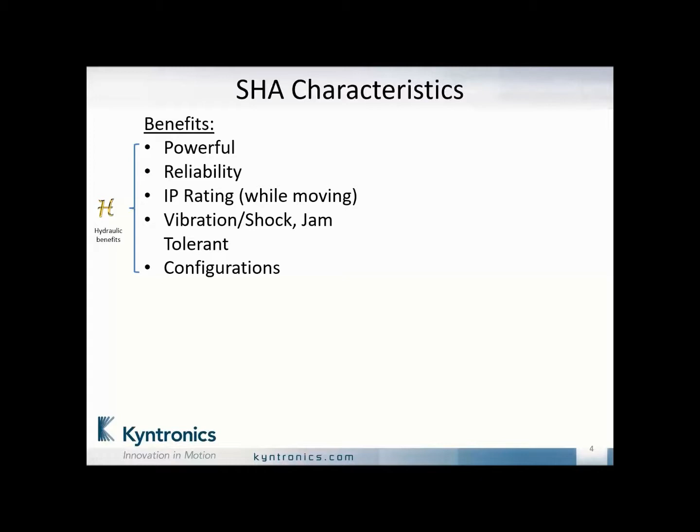So a quick review, the SHA itself is what we call the smart hydraulic actuator. It's a combination between hydraulics as well as electrical, the hydraulic benefits - very powerful, reliable solution. Hydraulics have been around for a long time. We're taking advantage of the seal technology, etc. IP ratings of hydraulics are very strong. Vibration, shock, jam tolerant - hydraulics have a lot of capabilities there, as well as some configurations we're going to be getting into.

And then we add the benefits of electrical - on-demand power, it only needs power when it's moving. A lot of versatile control capabilities, fieldbus connectivity, and of course no hoses or leaking hydraulic fluid. It's a very cost-effective solution - the SHA is on the low end as well. It really gets very cost-effective on the higher end, about 5,000 to 8,000 pound force.

Some of the challenges, of course, are the speeds at higher loads - those horsepowers are significant and massive motors. The other challenge is communicating that it's somewhat perceived as complex. When you look at the SHA, it can be simple, and we'll talk about that as well.

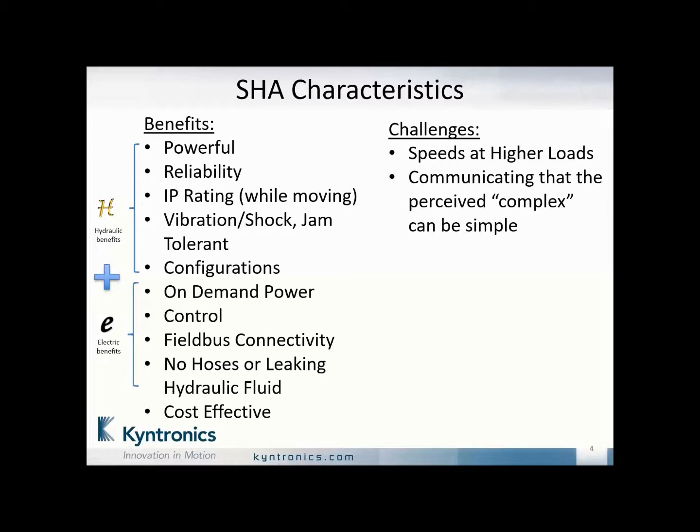One thing that we're trying to do to make it simple is the all-in-one solution itself. To our knowledge, nobody else out there is really doing what we're doing, from a standard product, from low horsepower, low pound force to 84,000 pound force, as a standard with voltages, AC, DC, etc. So we try to eliminate that finger pointing.

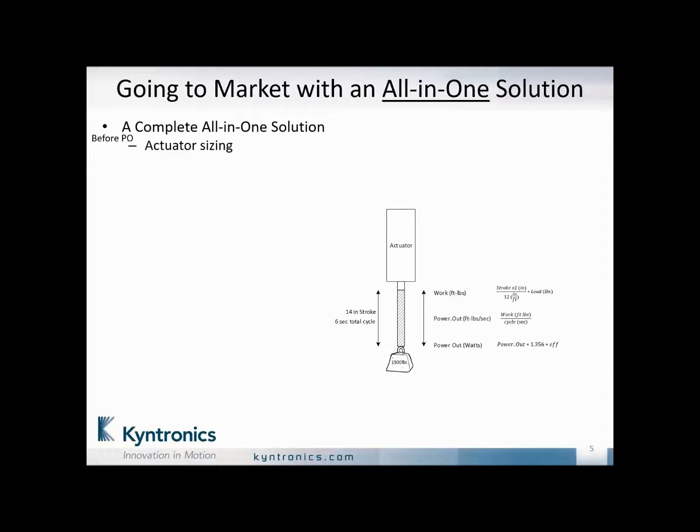We spend a lot of time up front talking to the customer, talking to you, trying to understand the application. It's very important to us to make sure we size it properly. We're involved right from the beginning. Obviously, whatever information you guys can provide is helpful in the situation. We make sure the machine, as we proceed, can fit the actuator in properly.

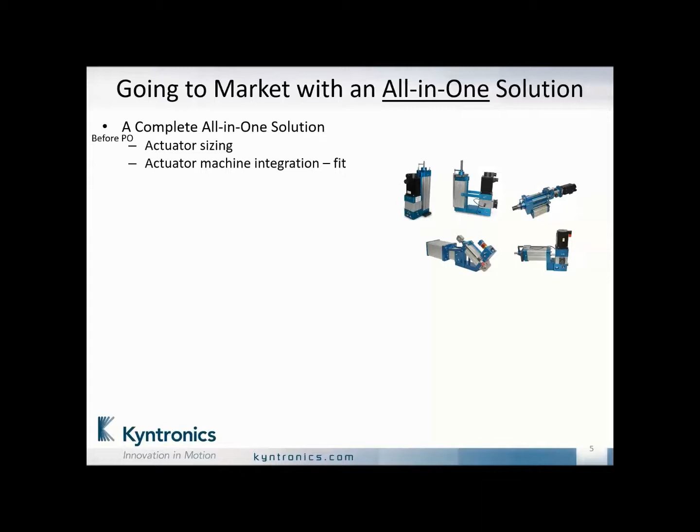There's all kinds of different ways to make that happen. We'll select the motor from hopefully our standard selection, select the drive itself, make sure the motor goes onto the actuator properly. As we proceed, again, it's electrical schematics from our standards - we'll make sure we apply the right schematics for the application, source the right drive, integrate the right drive.

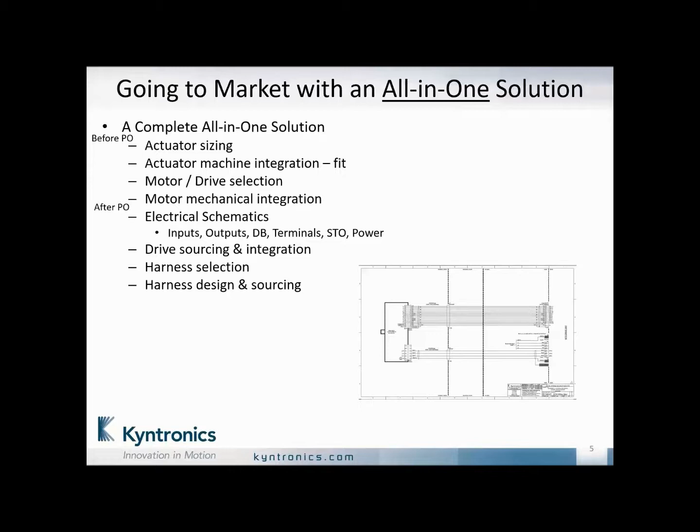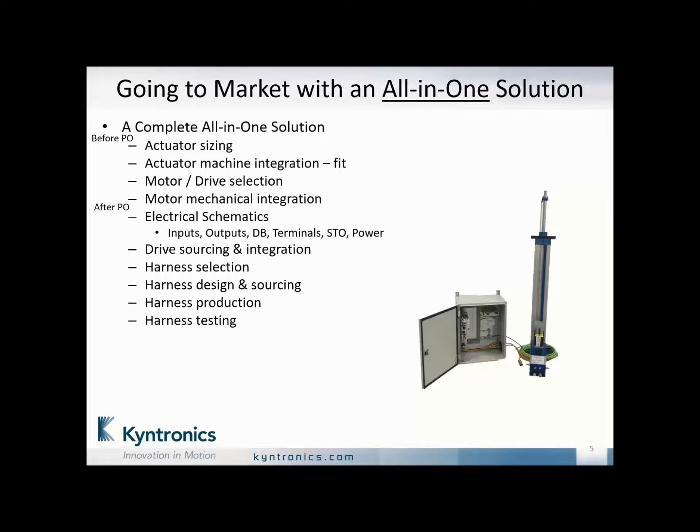Harnesses are a real pain, as we can all appreciate. Some harnesses we procure, some harnesses we produce here - we design and source all of that for you. We produce them, and test them, making sure everything's tested here. Harnesses that go out in the field untested can sometimes cost hours and a lot of money and headaches out there in the field. We try to make sure everything's tested as much as possible here.

The software itself - integration, field bus, mapping - standard programming is used. We test everything here as much as we can to the application. Of course, tuning in the field may be required, but at the end of the day, it's owned by Kyntronics. The only finger that's pointing is at Kyntronics. We try to make sure that everything's done up front properly, so at the end the result is a satisfied customer.

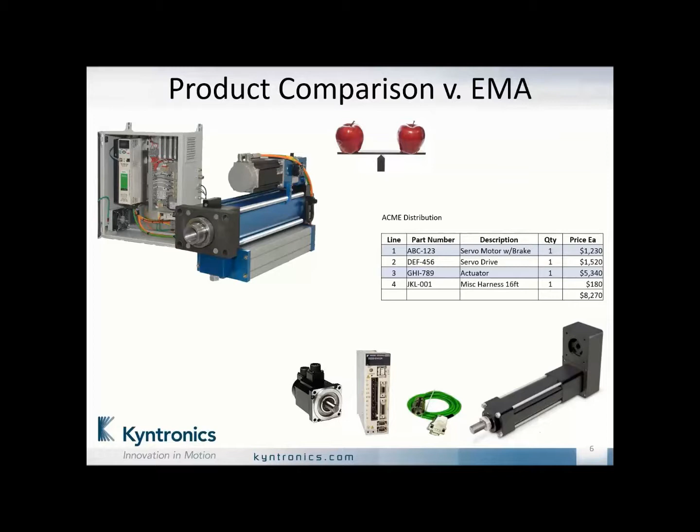A lot of you have seen this - this is, again, important, we run into this over and over again. It's the apples-to-apples situation. A procurement person sees our quote and sees a competitor's quote, but when we have the quote reviews, which is very important - hopefully we can continue doing that - we find out that, oh, it's just an actuator, and what we're providing is a lot more. Even if they find a quote from a distributor for just some loose parts, it's still not the same thing.

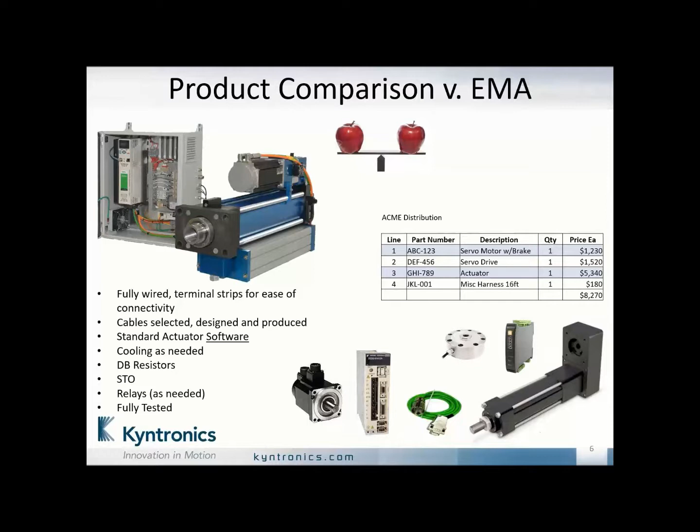There's a total fully wired solution, tested, programmed, with standard programming. You can even add in the load cell and amplifier, etc., as part of the cost. These adders for reliability are a cost factor as well.

Some mentioned that the Kyntronics product is a niche product, a custom product. I'd like to spend a little bit of time on that.

On our website, we have standard models up to 84,000 pound force, with a standard part number string. This particular string was designed to provide a BOM to manufacturing. So when a PO comes in, our manufacturing operations pulls down the BOM, knows exactly what's in it, and starts producing it, pulling parts, etc.

From this standard BOM, we use standard parts, so they're designed to be flexible. For example, this particular one goes to 1, 1.5, and 2 inch. The top plate's a 1 inch, so we can bore it out to 1.5 or 2 inch. This is a 2.5 and 3.25. This goes from 4, 5, 6. So we only stock 3, but we're able to go from low horsepower or low pound force to large. The same concept is done with the bottom plates, etc. We try to minimize our inventory while maximizing flexibility regarding the standard parts.

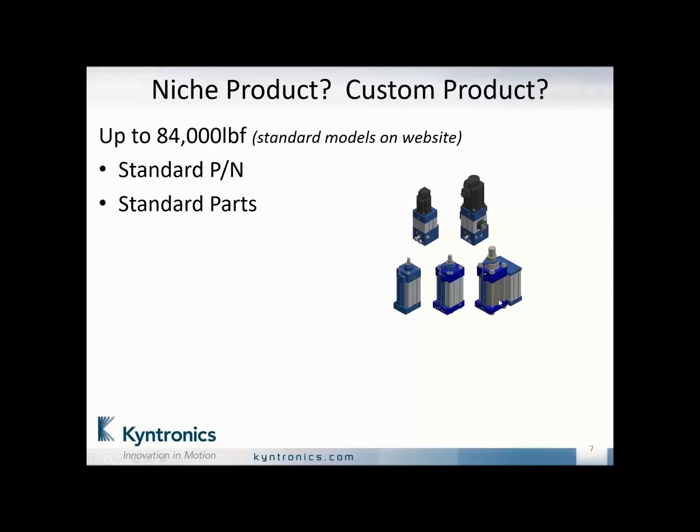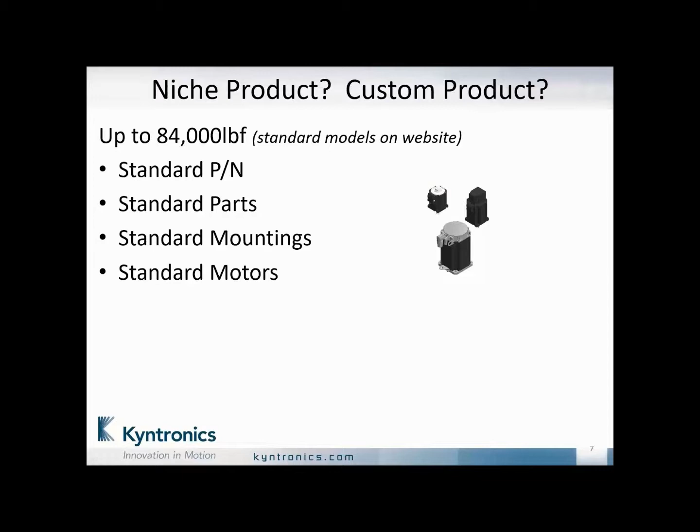Standard mounting is used across the line as well. Standard motors, so we use the same motors where applicable. We have the settings for these motors, cables, etc. We try to do the standard over and over again. Standard drives, the M700 from Control Techniques, M750 - the same program goes into those.

So I guess what we're saying is it's really not a niche product, it's a standard product. We try to standardize as much as possible. Standard means lower cost, lower lead times. Standard programs, proven and reliable. They make things happen out there properly. Of course, custom we can do it - we've done it. That adds cost, and sometimes it adds to the lead times as well.

The word servos at times is somewhat overwhelming. We're trying to make that simple. So when we supply the Control Techniques drive, the customer does not need to get into the software, doesn't need to download the programs. They can, and we've done that before with them, and we can do scope traces and things like that, debugging and helping them on their machine as needed.

But basically, if it's a field bus, this is just Ethernet IP, which is the most popular network we provide. You just have to worry about a few registers - command register, speed limit, target position, that's about it. That's all you've got to worry about from the PLC's point of view. Of course, you can look at some feedback, but there are just a few registers going back and forth to set up, and it's a very versatile concept.

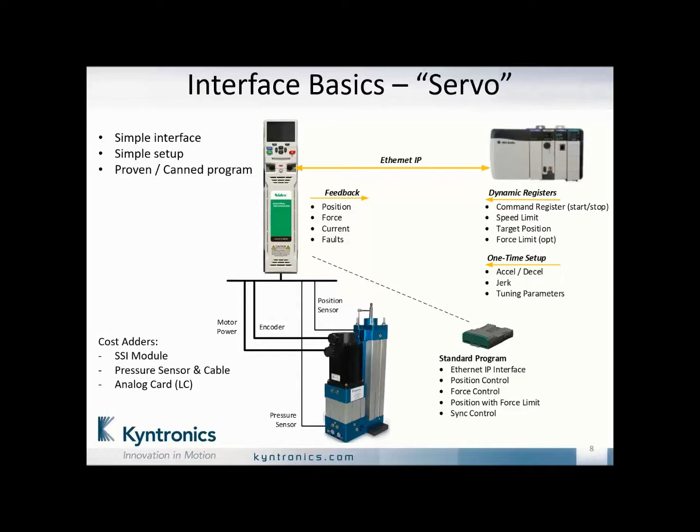Again, it's a servo - we do the closed loop control and size things properly. No metal binding, no mechanical binding wear items. It's a very efficient means of converting rotary to linear motion, with no hoses and no thread connections.

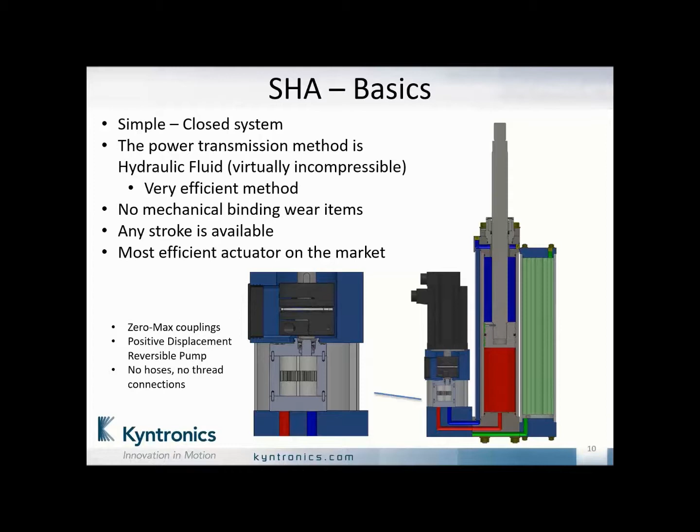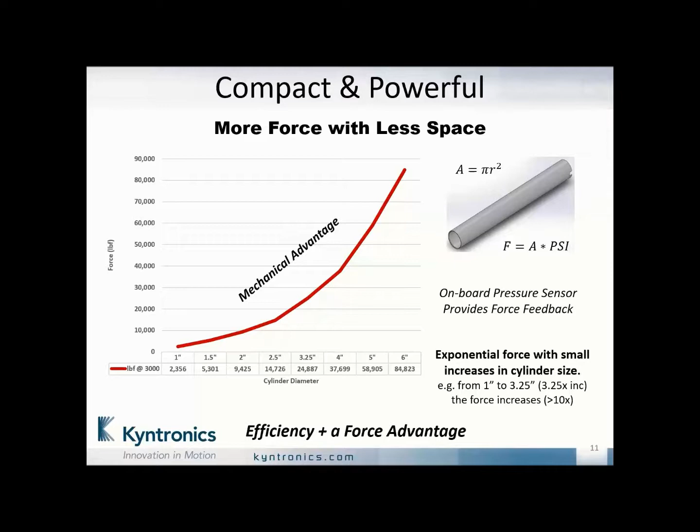A very advantage of hydraulics is that area equals pi r squared. As you can see, for example, going from 1 inch to 3 1/4 inch, that's a 3.25 times increase, but the force increases by 10 times because of that exponential relationship. This is the huge advantage with hydraulics regarding force density, and of course that's a benefit for Kyntronics and the SHA.

Another advantage with hydraulics is it's just fluid moving around, so you can do clever things with the configuration to fit in a machine. There are a lot of different machine orientations out there, and we've done all these and more. These are our standard configurations, and it's just moving fluid. So you can have a spacer block - an inch, 2 inches, 4 inches - to get this around a certain barrier inside the machine, etc. So this is another nice advantage with hydraulics, just moving fluid around.

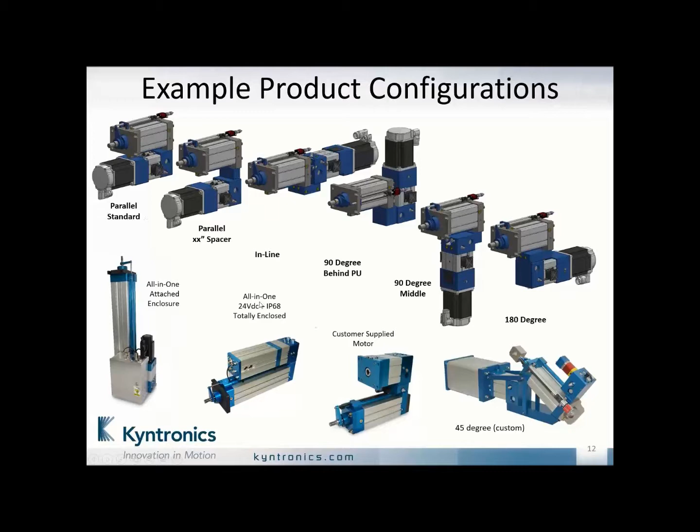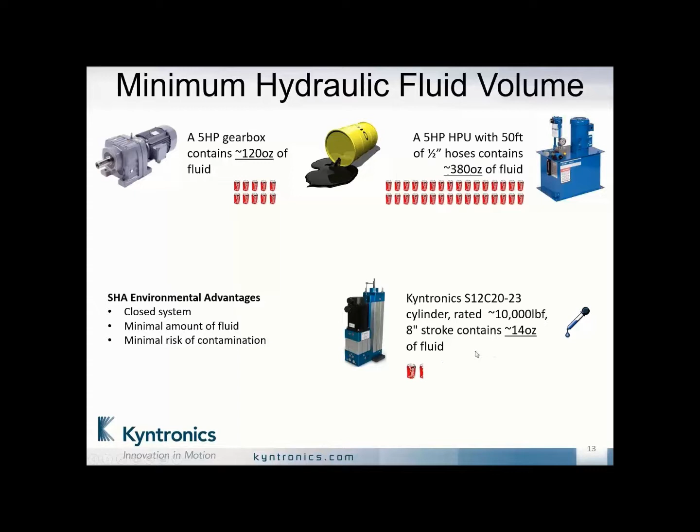Going electric, hydraulic is what they're trying to get rid of. They say, hey, you're adding hydraulic, we're trying to get away from hydraulic. But the point is that there's not a lot of fluid inside the Kyntronics actuator. For example, the 10,000 pound force actuator with an 8-inch stroke is only around 14 ounces compared to about 120 ounces with a 5 horsepower gearbox. So even if there's a catastrophic issue, a tow motor runs into the actuator, you just get a mop out and pick up the fluid and move on.

So going electric, hydraulics went electric. This has been a strategy for the EMAs to go after the hydraulic world, and some OEMs and some end users are somewhat demanding to get away from hydraulic for all kinds of different reasons.

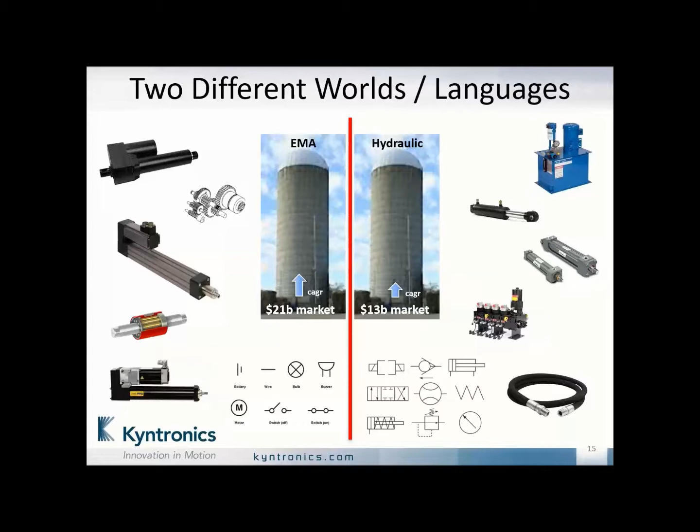There are two different worlds. The EMA world is servo-oriented, position control, force control, a different way of going at moving motion. Hydraulic is a different language, a different way they go at moving motion. And somewhat the lines are challenging to cross. EMA sales and application guys don't necessarily know all the hydraulic ins and outs. There's a quote from one of the websites out there: all you need is a phone and a ruler to convert hydraulics over to electric, which pretty much says it right there. Hydraulic engineers may not know all the electrical side of things, the servo needs, the servo control, etc.

The end result many times is an unhappy OEM. We're running into them and we're helping them out.

So before I get into some of the things to look out for and to ask about, I wanted to dig into what are the benefits and challenges of hydraulic systems versus electrical. Some of the benefits we all can appreciate: they're very powerful, high force density. Simple force control, force equals area times PSI. Fast speeds are available with hydraulics. They are reliable - yes, they leak, but you just change out a hose here, do this or that, and keep these things running. No brakes required to hold position, of course. Vibration, side loading, impact, jam, ingress protection - all those are benefits in the hydraulic world.

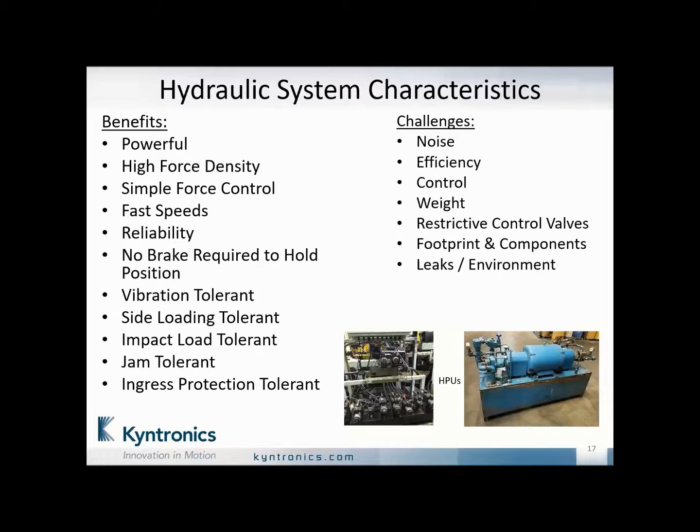Yes, some of the challenges: they're noisy, they're not all that efficient, it runs all day long. Somewhat challenging to do precise control, weight - especially on mobile applications. Restrictive control valves, heat, controlling capabilities, footprint - expensive footprint in plants. Of course, you have the leaking and environmental issues. There's a lot of benefits with hydraulics.

Electrical benefits, of course, it's all electric. Efficiency - it only runs when demanded. Control versatility is the major benefit with electrical characteristics. Field bus connectivity, of course, and no leaks.

Some of the challenges: the reliability side of things. Ingress protection - they're only rated for static, not moving, a lot of times. Heat, duty cycles, maintenance issues - they have to maintain, make sure there's grease in there. They get really expensive on the larger horsepower, above 5,000, 8,000 pound force. Very challenged with side loading - they don't like that at all. Vibration, jamming, impact loads are all negatives for the gears, metal to metal wear, stroke length limitations, the screw buckling issues on the longer lengths, and they require a brake to hold position.

So knowing all that, what are some of the things you need to consider when you're a hydraulic person - what to ask the EMA supplier? These are just some of the questions you may want to consider. Expected life - challenge the EMA supplier for the expected life. If you're a hydraulic supplier and you know your customer wants to go electric, these are some of the things you may want to educate them on, or even get involved, and of course get us involved.

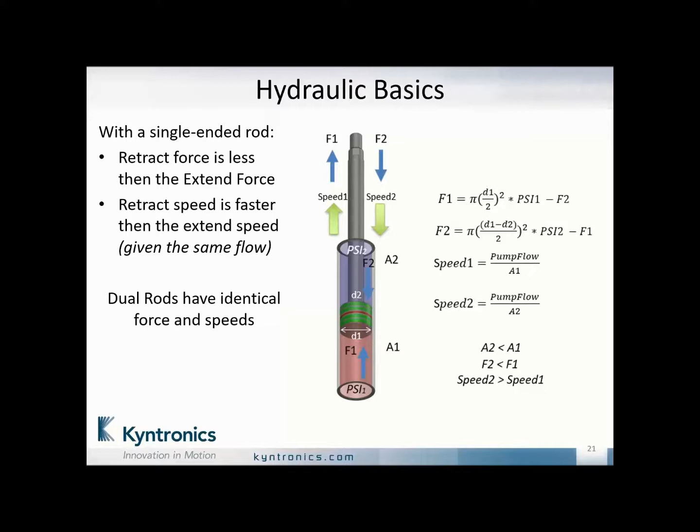Simple calculations regarding, it's nice to know, if you're moving a certain mass over a distance in a particular time, that's power. That's work being done. It's converted to watts.

Understanding your efficiency. So if you calculate this thing should be 15 horsepower and somebody came in with a 7 horsepower EMA quote, you know something's wrong there. Something needs to be reviewed. Does it make sense? So this is just some basic calculations that one should do regarding basic horsepower moving from point A to point B in a certain time.

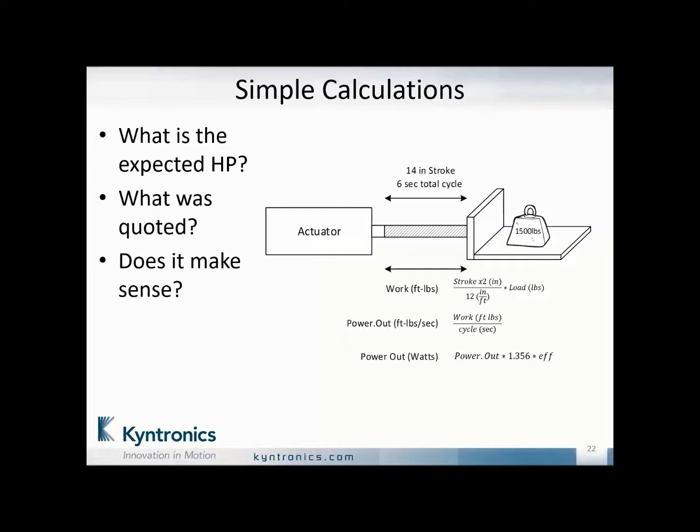So when going electric from hydraulics, definitely get us involved. We understand what questions asked. We understand both technologies. We produce both technologies. We've replaced several hydraulic systems out there.

We ask the questions. We do a deep dive. We understand the issues regarding the servo and the control and the dynamics on the machine. Make sure the actuator fits on the machine. We understand the control needs, what's happening today, what do you want to accomplish in the future, and we work with you and the customer to make sure that that happens.

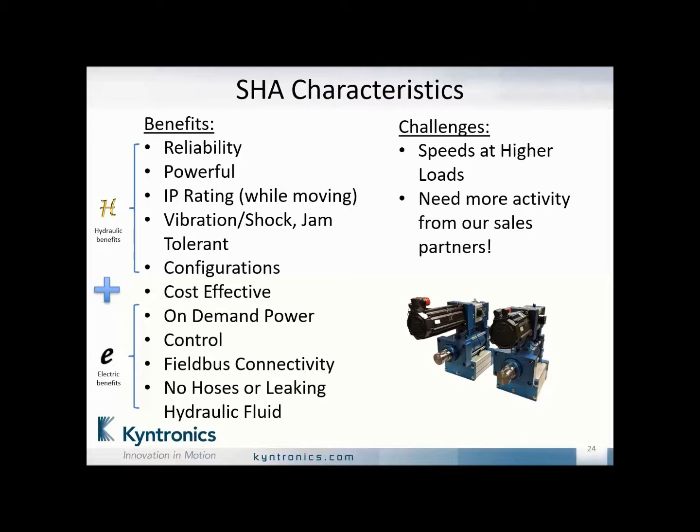Just to review the same thing we showed before, SHA Characteristics again combines the benefits of both electrical and hydraulic. It eliminates a lot of the headaches from both of those technologies. So a lot of benefits with the SHA Characteristics and the SHA itself.

Changing gears a little bit regarding the tools. We mentioned it in prior webinars. Rockwell AOI, it's starting to get a lot of good traction. We're available for your customers or even distributors to go through a deeper dive into the AOI itself.

The AOI takes that program that we've been developing over years and places it into this single AOI. Thousands of lines of code is placed in there: position control, force control, position with force limiting, etc. That's all available.

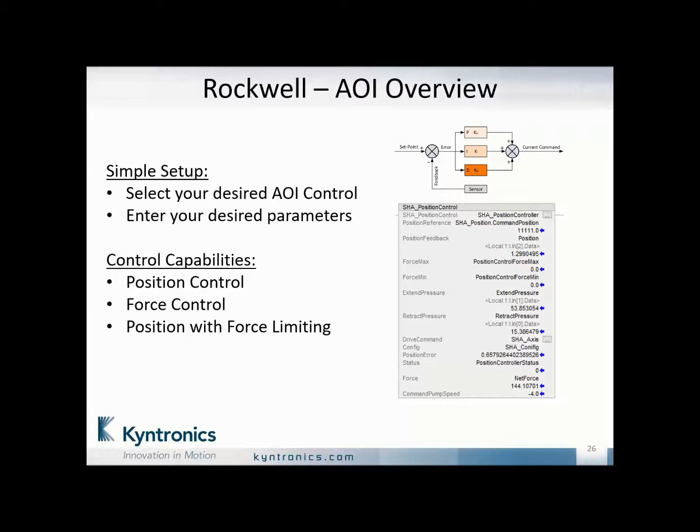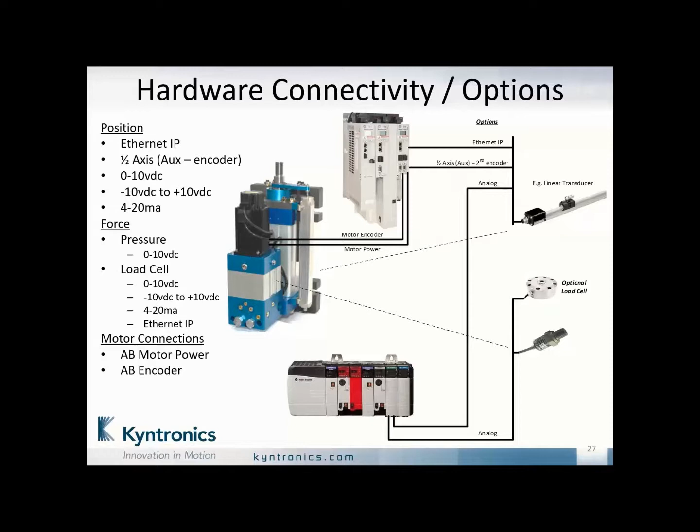Gives you a lot of versatile hardware connectivity. You can go into the PLC, you can go directly into the drive itself, position, force control. Again, a lot of versatile hardware options.

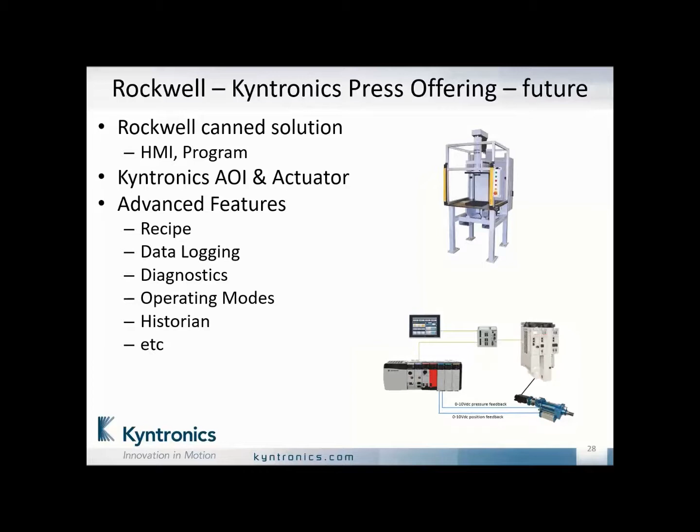Another project that we are working on with Rockwell is a press offering. So if you're interested, or if your customer is interested or desires a total Rockwell solution, HMI, panel view, etc., drive, PLC, that's being developed along with the Kyntronics actuator, using the AOI. So if you have somebody out there interested in a press offering and moving this forward, obviously projects and orders push things along both at Rockwell and here, and let us know how we can help.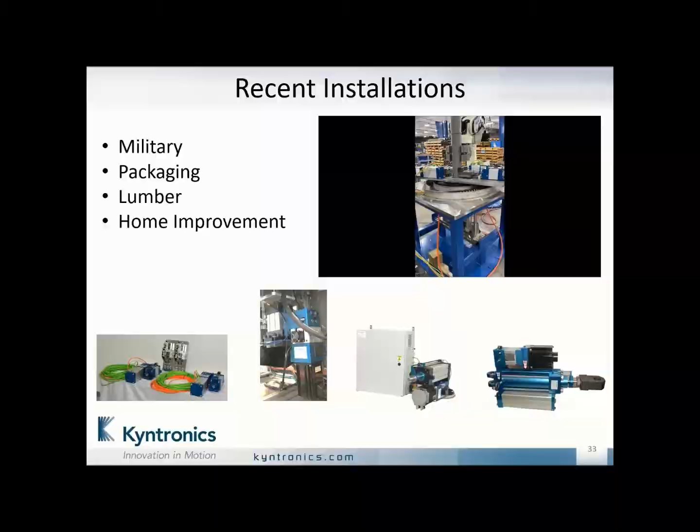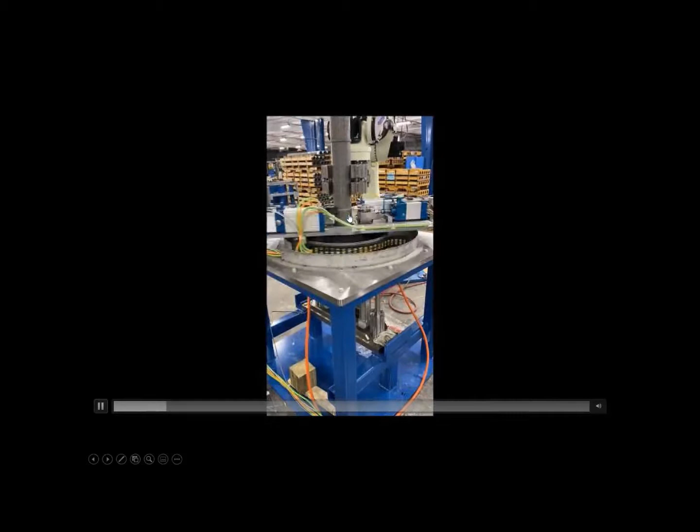This first one you can see is like a pipe cutter - you have a cutter and some rollers. They needed precise control cutting into this; they didn't want to go too far or you'd have some issues. This is in the packaging world, we're pushing up from the bottom. Again, the packaging industry is doing very well.

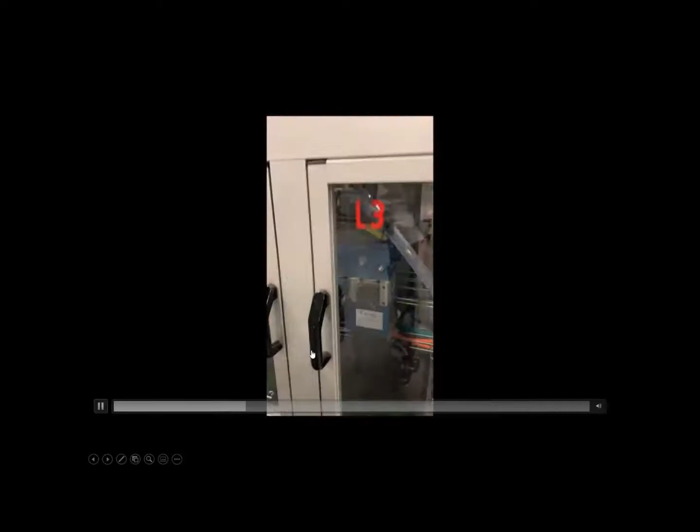This particular one, they replaced a hydraulic solution with this simple little actuator being installed on the bottom. They love it - it increased their efficiencies.

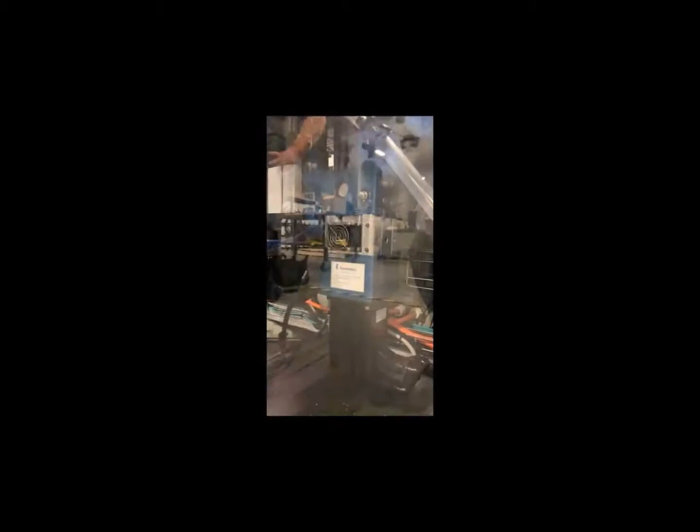This is a lumber application - a large saw that's being lifted up and down, replaced with an electro-mechanical actuator. The lumber industry is booming in various segments of the nation itself. Something to consider.

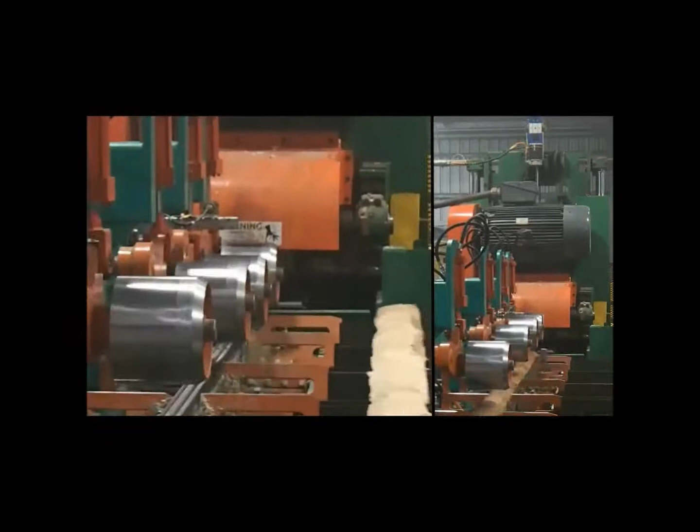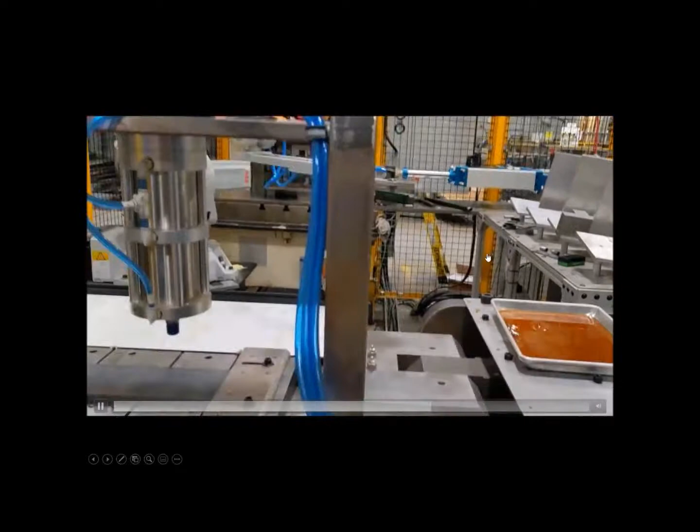This is in the home improvement world - this is a 60,000 pound force actuator, there's another actuator in the back. You can see this place is clean. They replaced hydraulics - this is precise control, again a 60,000 pound force actuator, for bending a hinge, again regarding precision control.

You never know what's in the backyard and what can be applied with these actuators.

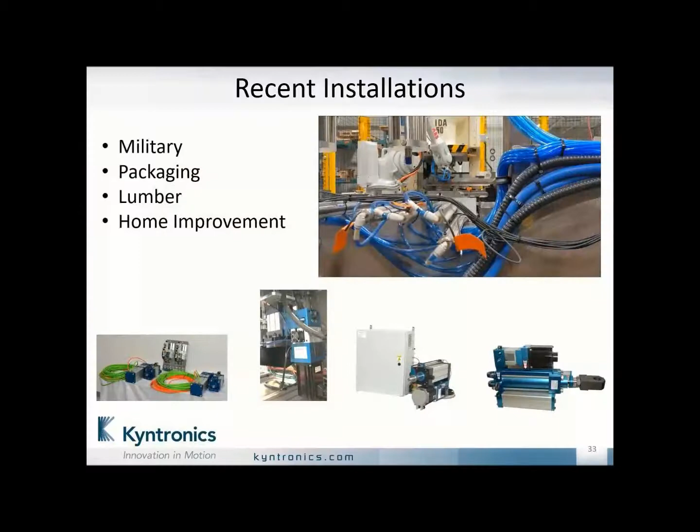So that's pretty much it. When you have that customer come to you asking to inquire about going electric from hydraulics, make sure you get us involved. We'll take care of the customer, make sure it's done right. We always are trying to make the complex simple - an all-in-one solution is very important to us. It's a way to make that simple. Again, it's a versatile offering, very reliable, efficient, and a very cost-effective solution.